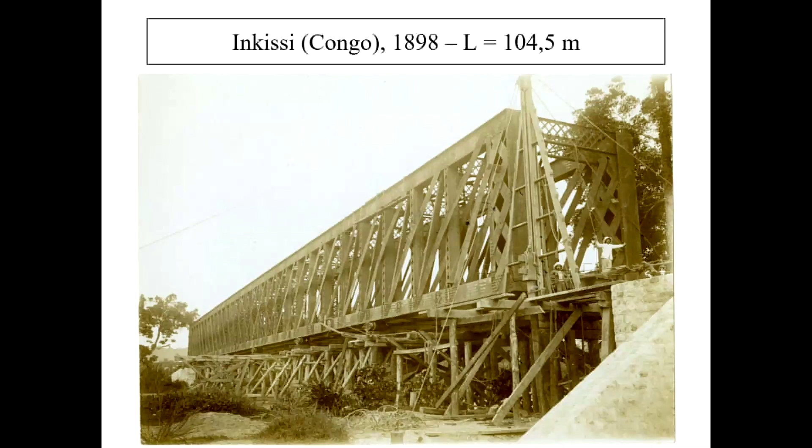So I guess you know that the so-called invention of Vierendeel was to remove the diagonal elements of the girders, at a time when the standard design of steel girders was either lattice or warren type. This is a typical railway girder produced by the Belgian steelwork industry around that time. It's a 104.5-meter span for the railway line between Matadi at the mouth of the river Congo and Leopoldville, then the capital of the Congo, completed in 1898.

He exposed his idea in a paper published in 1896 in Belgium, and also in patents submitted in Belgium, in Great Britain, in Austria, and in France in 1896. The text of the 3 patents shown here, the Belgian, the UK one, and the French one, is very similar.

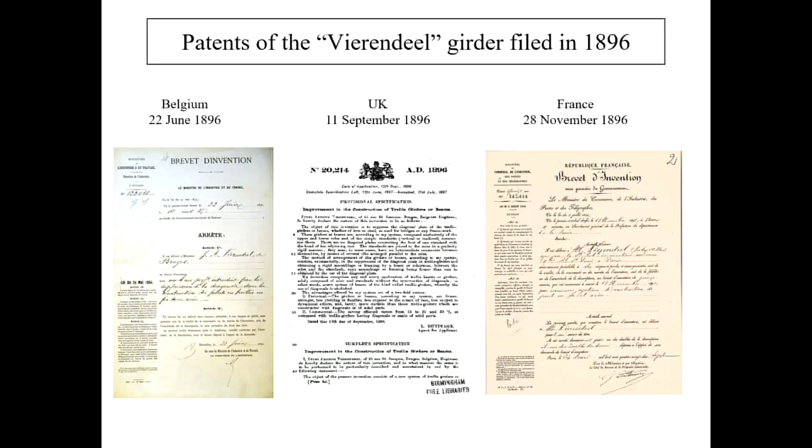Here are the plates of the patents that illustrate this idea of girders without diagonals. We have rather sturdy and stiff nodes, and also vertical posts, here or here, with significant bending stiffness. Vierendeel imagines girders with constant depth or slightly varying depth above here.

Of course, this strange design with a double level of cells has never been applied, and neither has this fancy, let's say, neo-Gothic architectural decoration of these bridges ever been applied.

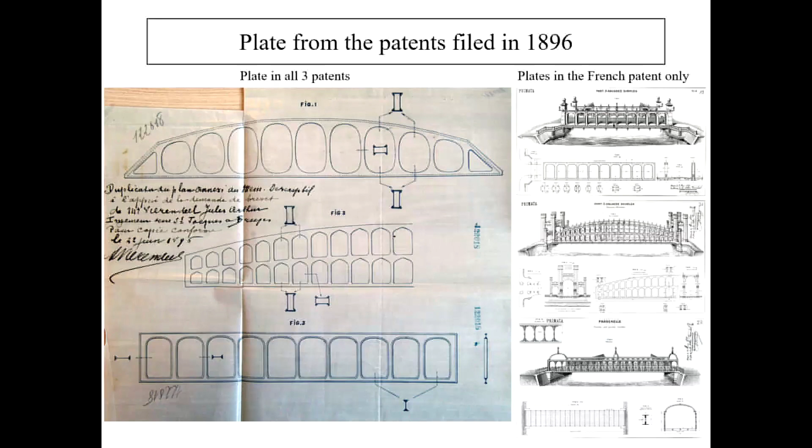Was the idea of removing the diagonals really new? Quite certainly not. The story of the girders without diagonals before Vierendeel has yet to be written. I have picked here 2 examples in the UK, well before 1896. They are both quoted in the book by Rennisson on North-East Civil Engineering Heritage.

There is this large railway bridge over the Wear River in Sunderland, built in 1879, still in service, and the supporting girders of the canopies and roof at Durham Station from 1870. To be fair, Rennisson does not state explicitly that these are actually true Vierendeel structures. Typically for the arch bridge, he says that it is a Vierendeel bowstring type, and I suspect that the actual structural behavior is more of the bowstring type. And the Durham girders, being in cast iron, could never actually function safely as Vierendeel girders.

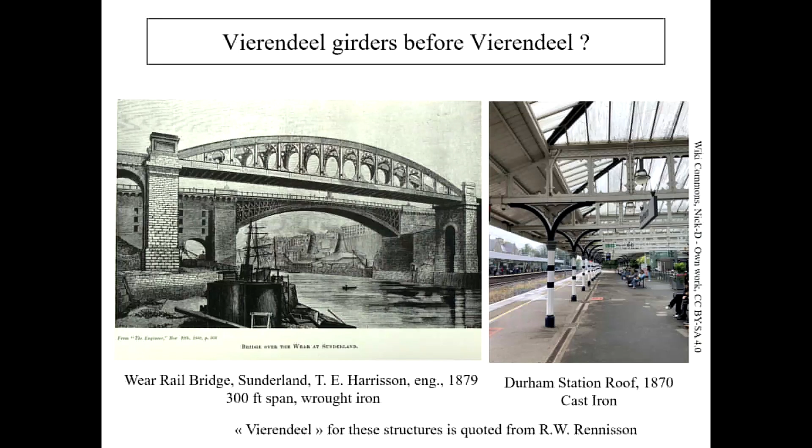Removing the diagonals of a girder is not sufficient to have the structure truly working as a Vierendeel girder. Why? We have to hear the arguments of Vierendeel and understand the context of structural design at the time, in the mid-1890s. Vierendeel was well aware, as many other engineers, that the elements of a so-called trussed girder are submitted not only to normal forces, but also to bending.

This bending arrives from the practical realization of the connecting nodes, made with gusset plates and rivets, which are not perfect hinges. So the stress arising from the rotation of the nodes, and therefore from the bending of the elements, were called secondary stresses, although they were known to be not so secondary to the primary stresses resulting from the normal forces.

There were already methods available to estimate these secondary stresses, but they were very tedious and cumbersome to apply. The practice and philosophy of design of truss girders at the time was: one, assume all nodes to be fully hinged perfectly. Second, derive the normal forces in the elements only by the equations of statics, equilibrium, or by graphostatics methods.

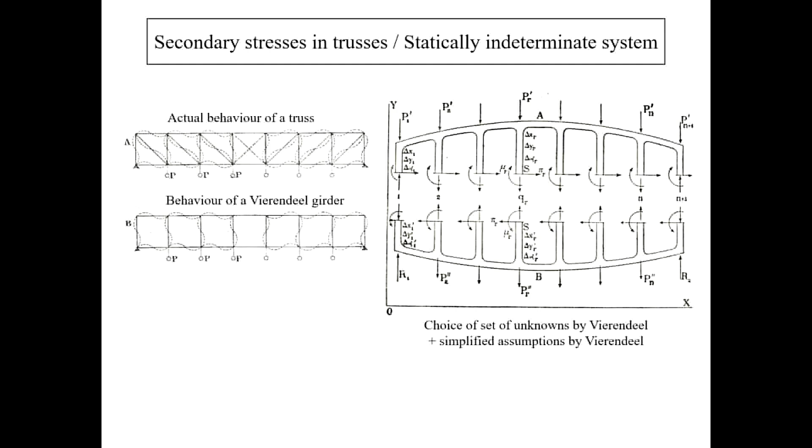And the following year, 1897, Vierendeel set up a test up to failure of such a prototype. This occurred during the international exhibition held in Brussels that year. It is said that Vierendeel paid himself for the test. It took place in Tervuren, in Brussels, on the grounds of the site of the exhibition dedicated to the Congo.

Anyway, this is an extraordinary test by its sheer size. The loading of bridges were common, but I believe that there had never been before a test up to failure of such a large steel girder for bridges.

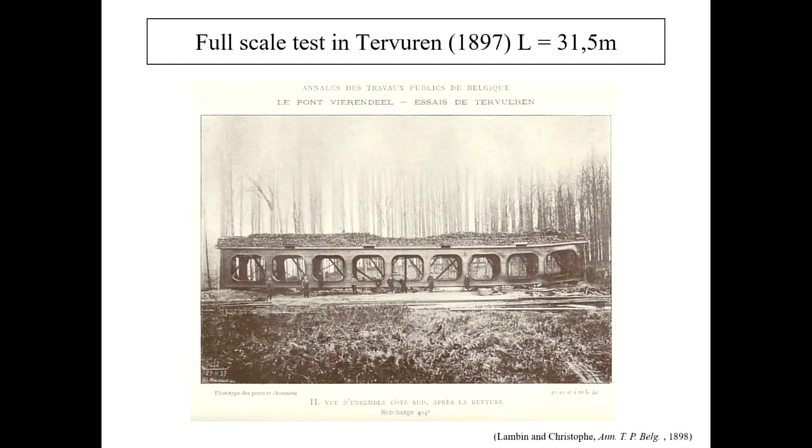The Ministry of Public Works dispatched two engineers to watch the test. They wrote an extensive report which raised doubts about the claim by Vierendeel of the economical character of his system. Vierendeel immediately replied and dismissed the objections of his contradictors.

And this will always be the same trend for decades. In the discussions concerning his system, Vierendeel praises the engineers who support him and attacks vehemently and often with bad faith the detractors of his system. He never accepted any criticism of his invention.

Three last comments here. One of the two witnessing engineers and author of the report was Paul Christophe, who would, two years later, be the first to publish an extensive and non-commercial survey of the state of reinforced concrete construction and technique, and also introduce the standard elastic method for determining the longitudinal reinforcement in cross-sections of reinforced concrete beams.

The two witnessing engineers, Lambin and Christophe, published their report in the official journal of the Ministry of Public Works, the Annals of Public Works, but also that same year in the Bulletin of the International Association of Railways, which supports the argument that the Vierendeel girder was from the beginning meant to be used for railway bridges.

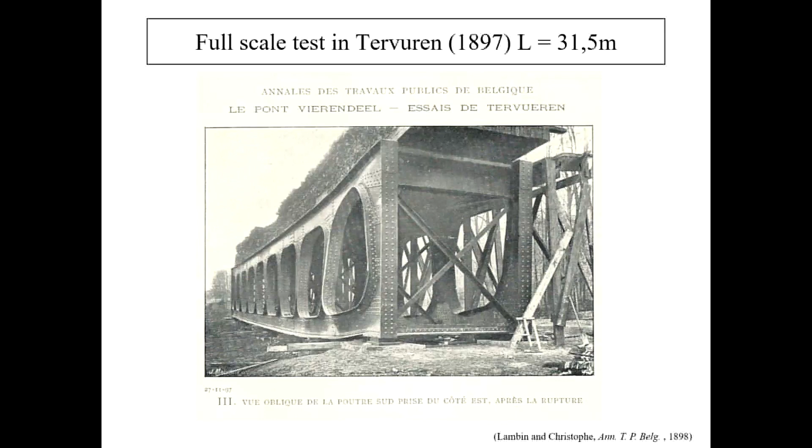Just one month after the completion of the test, Vierendeel submitted his patent in the US. It includes an illustration of a different kind of girder intended for railway spans. You see clearly the tracks here, the longitudinal beam supporting the tracks, with varying depth at this time.

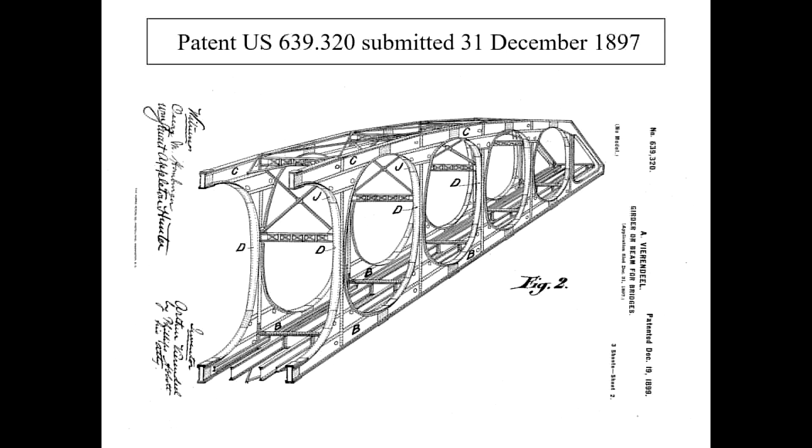But there will be no application of Vierendeel girders to railway bridges before the 1920s, meaning 25 years after the patent. In fact, all Vierendeel girders designed by Vierendeel himself in Belgium, and there are not many, just 6 or 7 before 1914, are footbridges or road bridges.

The first, top left here, in 1898, is a footbridge built in the small town where Vierendeel grew up, was raised, Geraardsbergen. Curiously, Vierendeel never claimed in his writings to be the author of that first bridge.

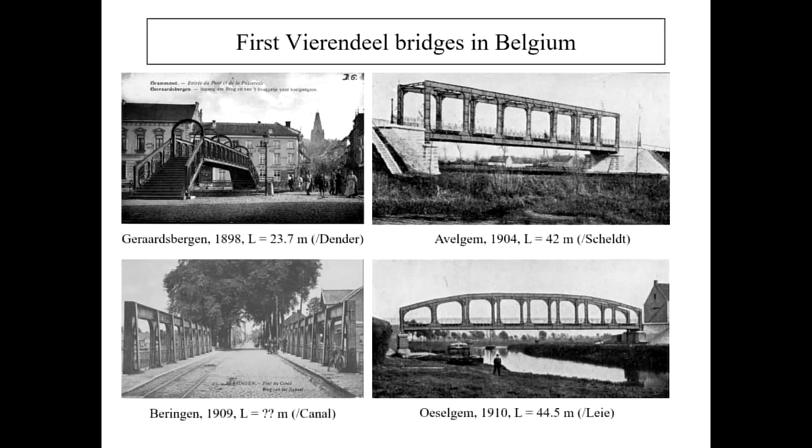Vierendeel also patented his girder without diagonals for reinforced concrete. He designed himself this footbridge over the tracks at La Louvière railway station, built in 1913. In Belgium, this was the first Vierendeel in reinforced concrete, and also the first time an arch form with a parabolic upper chord was built. I think that's a quite elegant design for the time, especially the detailed design of the connecting nodes.

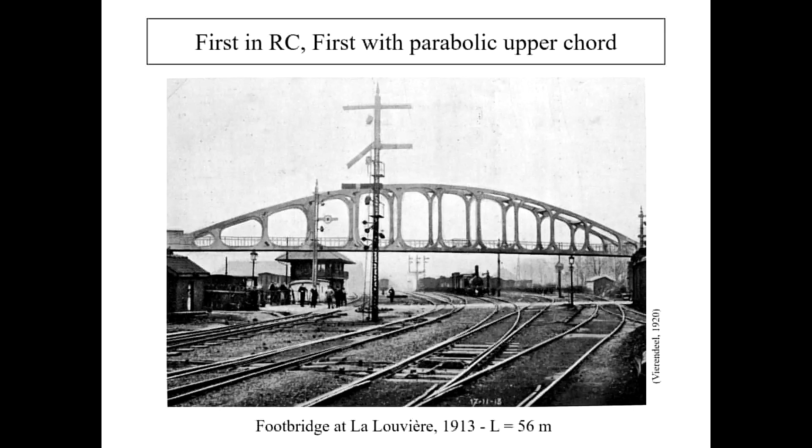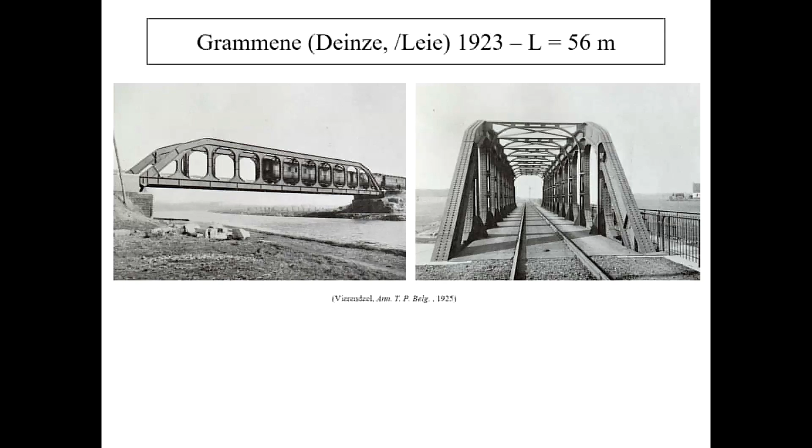So the first railway bridge using a Vierendeel girder that was adopted by the Belgian railways was only built in 1923: a single-track bridge spanning 56 meters over the Leie River near Deinze, not far from Ghent. But this bridge had a complicated history.

First, I would like to remind you of some dates. During the First World War, the Germans were not able to fully occupy the Belgian territory. The front line stabilized along the Yser River, and behind this front line the territory remained under Allied control.

In 1939, France and Great Britain were at war with Germany from September 1, 1939. But Belgium was only invaded by the Germans on May 10, 1940, and the battle lasted 18 days, until the capitulation of the Belgian army on May 28, by order of the king. In order to slow the invasion, the retreating Belgian army destroyed many bridges in Belgium.

In particular, this original bridge was destroyed on May 25. But two years later, in 1942, German engineers had already reconstructed the bridge, and already doubled it, because it was an important line to bring material for the construction of the Atlantic Wall.

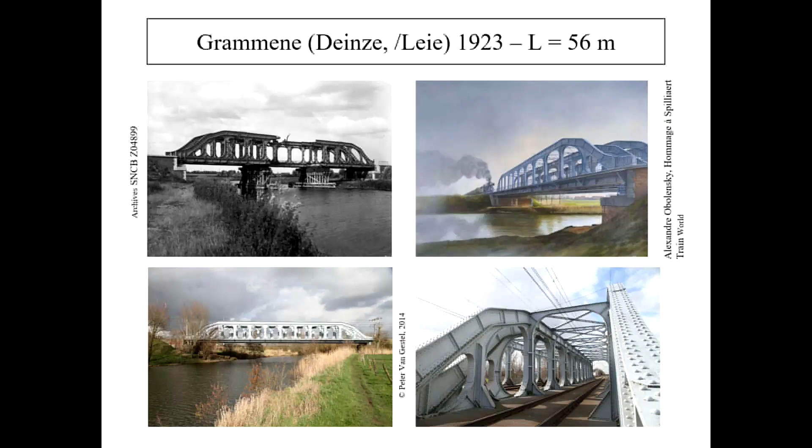The next chapter of the story of the Vierendeel railway bridge takes place in the Congo. Famously, the explorer Henry Stanley, exploring the territory for the Belgian King Leopold II, declared, "Without the railroad, the Congo is not worth a penny."

I already mentioned a bridge built in 1898 for that line between Matadi and Leopoldville. Early during the exploration of the territory, the mineral richness of Katanga had already been discovered in 1893. Katanga is this region here, north of Rhodesia, former Rhodesia.

In 1906, Leopold II set up 3 companies to exploit the Katanga province, which was still very isolated in the early 1900s. One of the problems was, of course, access. That's the reason why a railway company called BCK was set up in 1906. BCK means a railway company from the lower Congo region to the Katanga.

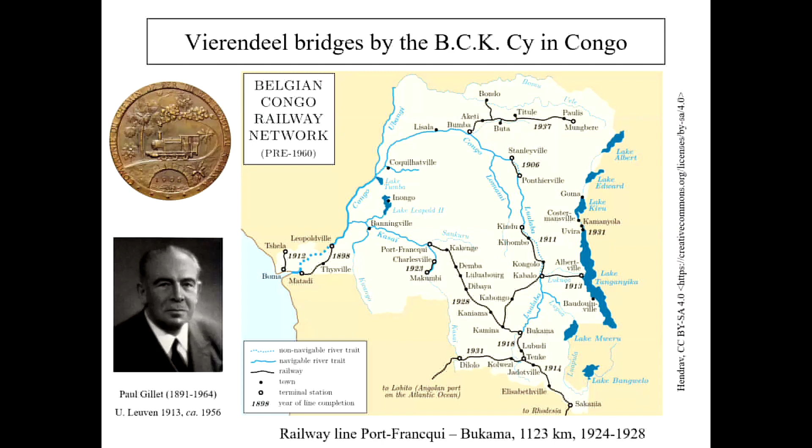Built between 1924 and 1928, between Port-Francqui here and Bukama here, that's a 700 mile long line, about 1,100 kilometers. The most difficult bridge to build was for the crossing of the river Lualaba at Bukama, at the eastern end of the line. The site conditions were difficult for building the foundations of the piers: geological conditions, speed of the stream of the river, and its flow.

The superstructure of this 250-meter long bridge consists of 4 identical spans, trapezoidal in shape, of 62-meter span. The line was inaugurated on July 7, 1928 by King Albert I and his wife Queen Elizabeth.

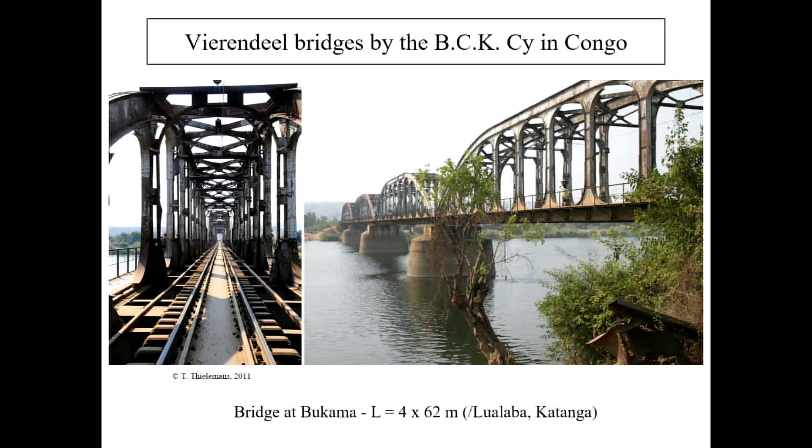This bridge is still standing today, even if it does not accommodate important railway traffic. It serves as a crossing of the river for pedestrians. The bridge at Bukama may be the longest on the line, but this bridge here over the Bushimaïe River has the largest span, 72 meters, single track, and is of the arched type.

What's typical of the Vierendeel girder can be seen quite well here: all elements have an I-shaped cross-section able to sustain bending forces, bending moments.

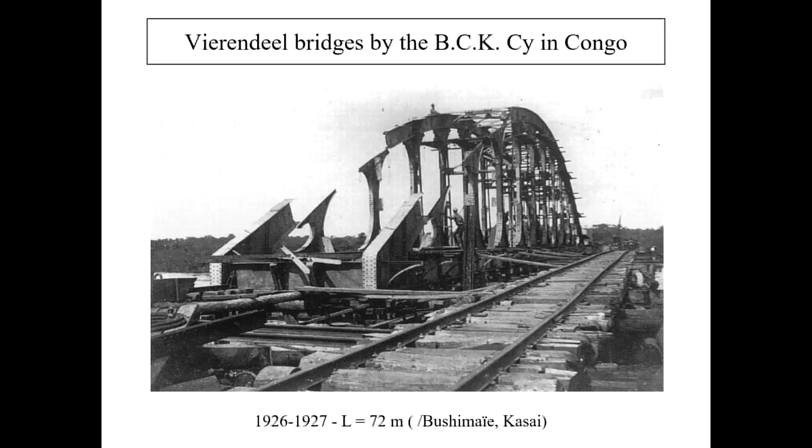I managed to find the drawings, blueprints of this bridge in the archives of the steelwork contracting company Baume et Marpent. What is very interesting to notice, it's written here, maybe you could not read it, so I will say it: all the technical details of the execution drawings are to be approved by Mr. Vierendeel. You see here his signature, dated from the last day of the year 1926.

So Vierendeel probably did not do himself all the detailed calculations of that bridge. Remember, he was also an official and also a professor at the university. But he checked the final results and signed the drawings, taking the responsibility, and most probably justifying like this the fees he was paid for, either as royalties of his patents or simply as a consulting engineer.

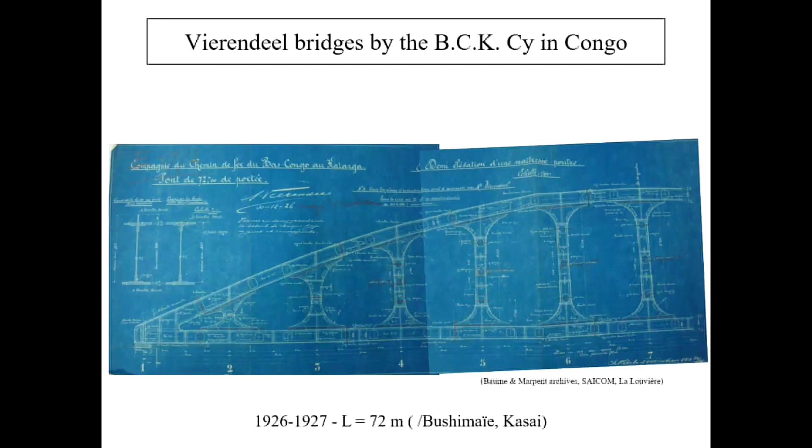Besides the Bukama Bridge, the Vierendeel Bridges built by the BCK company are very poorly documented. Apparently, there was a standard type for 42 meter span, and several were built by different steelwork shops in Belgium. With the help of Google Earth, I have spotted several of these Vierendeel bridges built for the BCK in the 1920s.

They are still in place, crossing streams in very remote areas. The definition of Google Earth is not very good for that part of the world, and they are nearly 100 years old. I have even found pictures from 2 years ago showing some maintenance.

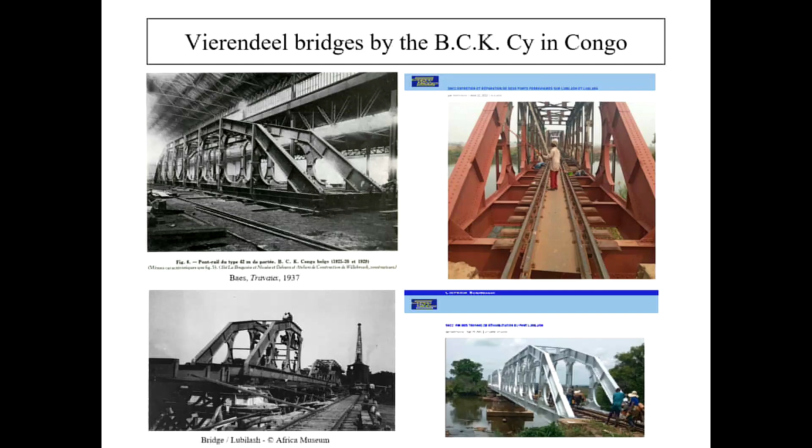From some pictures that are kept at the Africa Museum in Tervuren, it seems that Vierendeel bridges were built after 1928 on extensions of the line. Returning to Belgium, just after completion of the construction, there was a large number of spans, at least 25, in Congo.

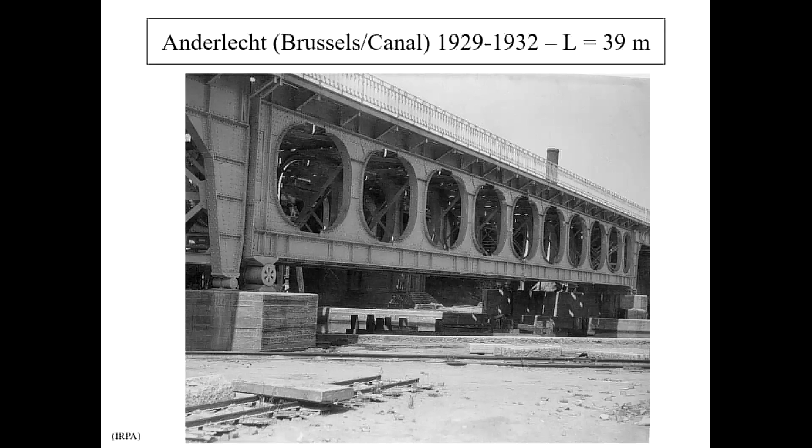The second Vierendeel railway bridge built for the Belgian railways is for this crossing in Brussels of the canal, a shape that reminds of the prototype tested in 1897. The span of the prototype was 31.5 meters and it is now 39. In fact, these are two independent single track girders, and they are skew also.

And here also, on the right, the signature of Vierendeel on the drawings, most probably prepared by the engineering office of the railways. The bridge was damaged, as many others, in May 1940. I will come back later on that kind of fracture caused by the blasts of the explosives, but it was repaired and it's still in service.

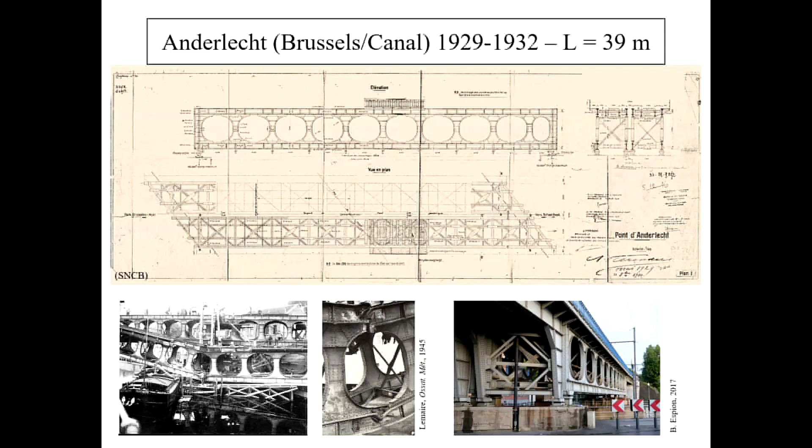I have not found that this bridge was damaged during the war, and it is still in service. In fact, there was no need to blast it before, because just another one on the same line had already been blasted.

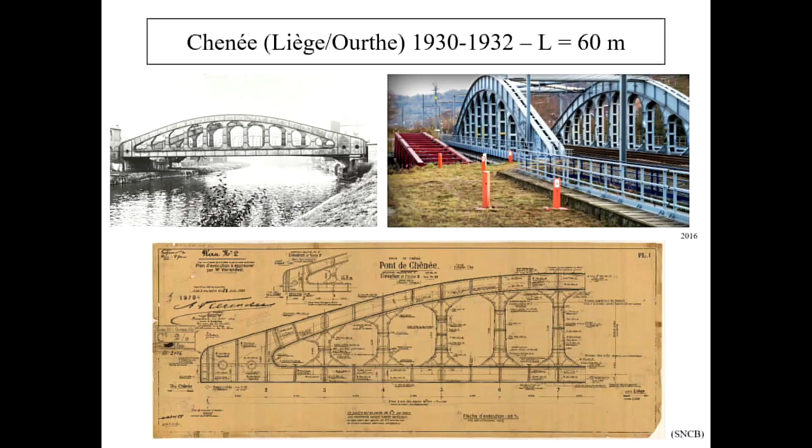From the late 1920s, only Vierendeel's so-called type 5, or arched form, will be designed and built in Belgium, and a significant number of these bridges will be built in the 1930s, either as road bridges or railway bridges. But a significant event took place in 1932 or 1933 to allow this: a settlement between Vierendeel and the Belgian government to allow use by the state administrations of the Vierendeel girder type without the supervision of Vierendeel, and presumably the payment of fees to him.

I rapidly survey here the story of the Vierendeel road bridges. I say rapidly because I would rather use another hour to develop this, and besides, I have already written papers about that story. This is intimately linked to the introduction in Belgium of the realization of connections in steel structure by electrical arc welding, a novel, untried technique at the time.

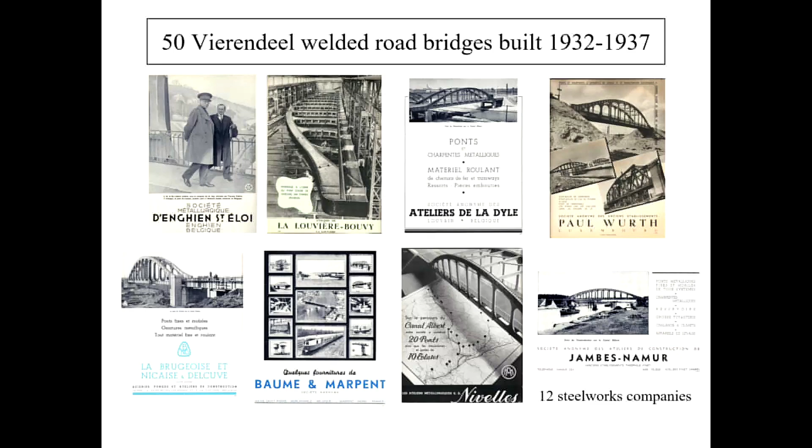After that initial success, about 50 Vierendeel welded road bridges were built between 1932 and 1937 by 12 different steelwork contractors. These are advertisements by 8 of them, and they all featured their involvement in the Vierendeel bridges of the Albert Canal. There were 3 suppliers of electrodes or welding processes, but the leader was the company Arcos, which claims to have contributed to the welding of 50 bridges of the Albert Canal.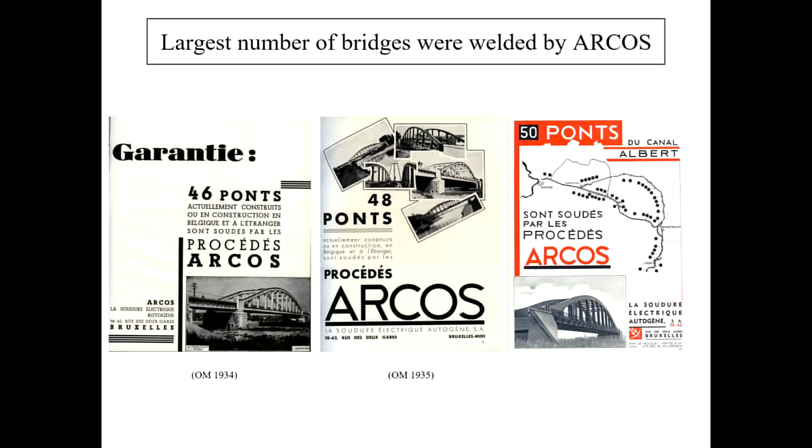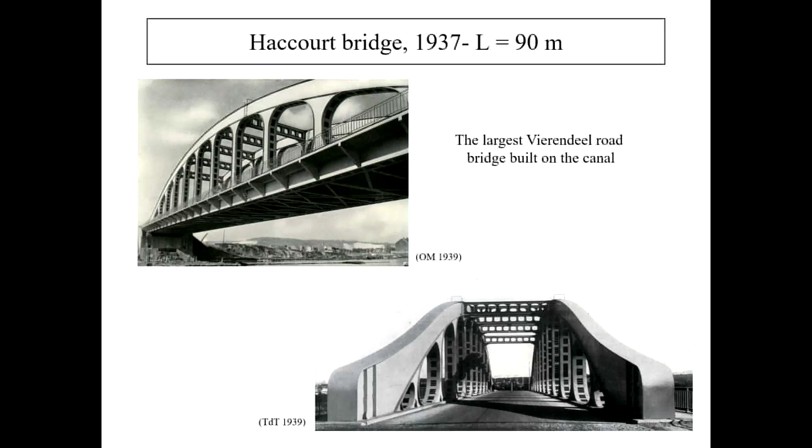The longest span, and one of the last to be built in that series, was in 1937, the bridge at Haccourt near Liège. The notorious bridge at Hasselt was the longest span of the type when completed in 1936.

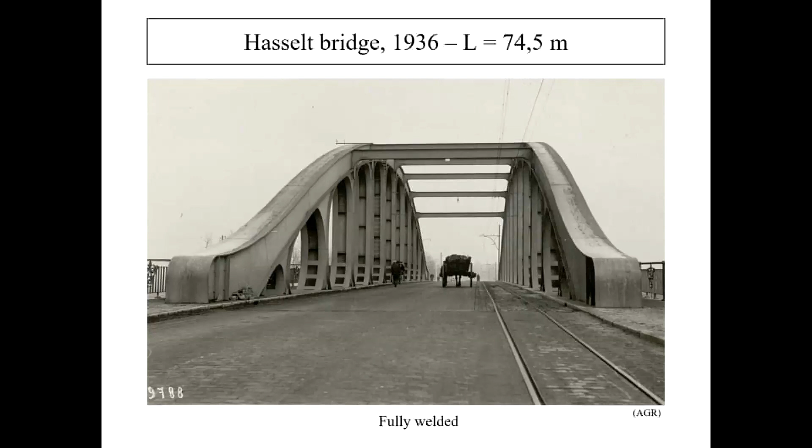But the bridge at Hasselt is unfortunately famously known internationally for its spectacular failure on March 14, 1938, when it suddenly broke and fell into the canal. It was early in the morning, no loads, no variable loads on the bridge, and no casualties. This is usually referred to as the starting event of the brittle fracture story of welded steel structures. But for months, even years, nobody was able to provide an explanation for this spectacular failure.

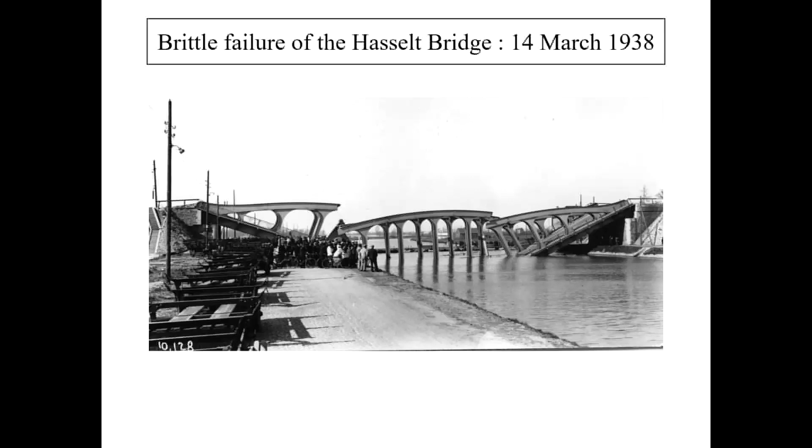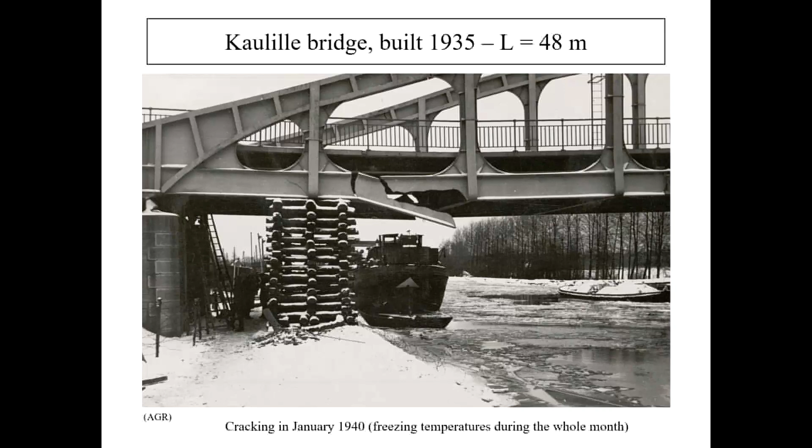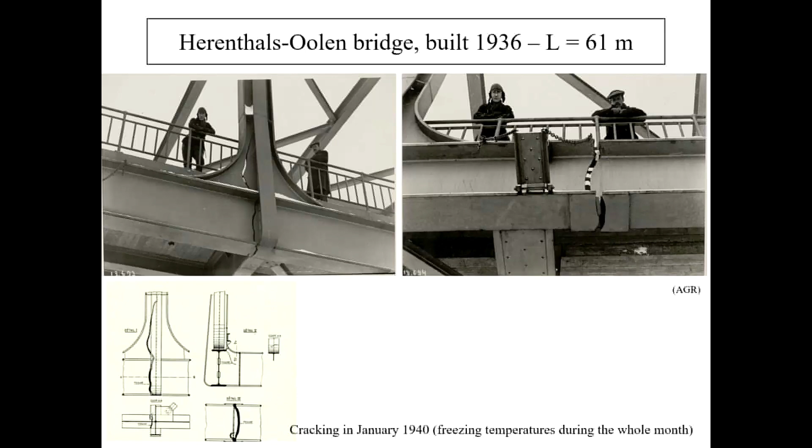In March 1938, all the Vierendeel welded road bridges in that program had already been built. But the Hasselt Bridge was not the only one. During the very cold month of January 1940, 3 other welded Vierendeel bridges exhibited significant brittle cracking: a small one at Kaulille, built in 1935; one with spectacular cracks across the beams at Herenthals-Oolen; and also a third one at Hermalle, also with spectacular brittle cracks.

But these were only the 4 most spectacular failures. In fact, cracking in the workshops and out on site had already been observed since the very beginnings of the introduction of the new technique, since 1933, and not only on Vierendeel bridges, but also on other types of bridges and even on lock gates.

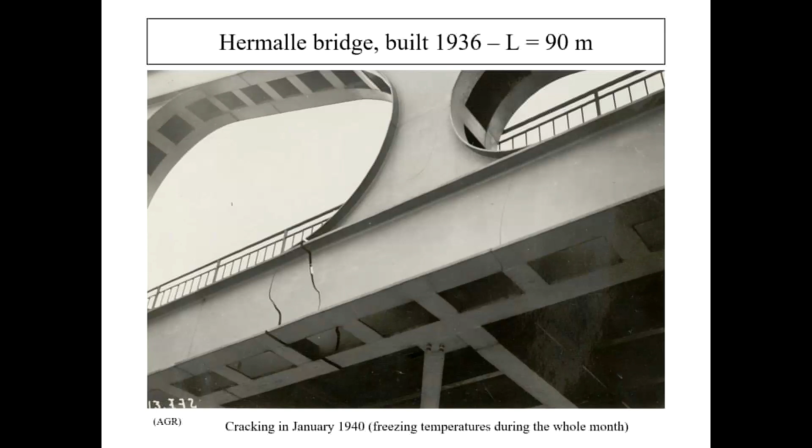Conclusively, it may be said that the carrying capacity of all these bridges was clearly insufficient considering their state, and it is somehow fortunate that they all have been blown up by the Belgian army in a hopeless attempt to slow the invasion by the German troops in May 1940, 5 months later. Therefore, the use of electrical arc welding was stopped for several years for bridge building in Belgium. And the reconstruction of the Hasselt Bridge during the war, of course, resorted to traditional riveted connections.

I believe that the wide-ranging applications of Vierendeel bridges in Belgium and in Congo in the 1920s and 1930s can hardly be grasped without an analysis of a network of influences between engineers, because the Vierendeel type bridge was never extensively used elsewhere. Of course, the top influencer, as we would call him today, was Arthur Vierendeel himself, but his alumni from Leuven included a large and influential group of followers who liked him, to use the vocabulary of today.

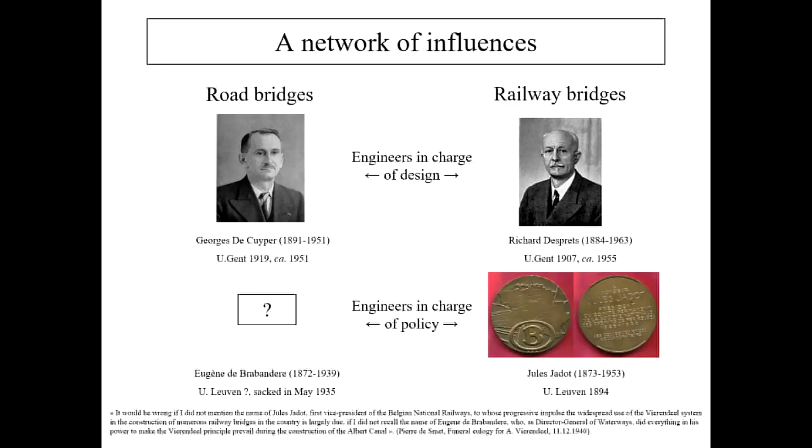Now it's time to begin the story of the dissemination of the Vierendeel railway bridges in Belgium in the 1930s. The first line to be electrified in Belgium was the fast line between Brussels and Antwerp. A new line was built with two Vierendeel type bridges at Mechelen.

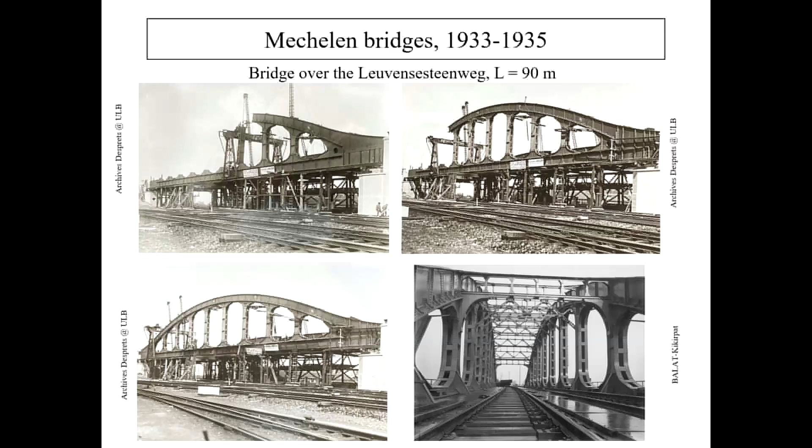But building still Vierendeel bridges in the 1950s means more than nearly 60 years after the patent of 1896.

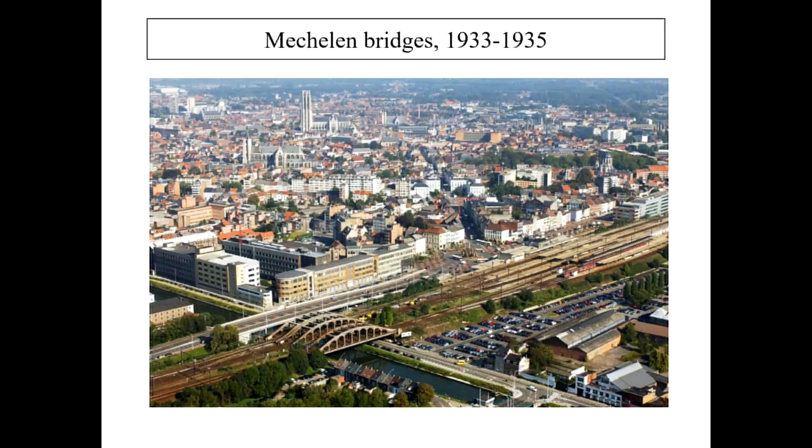These are also views of the erection of the smallest one, with a span of 63.5 meters. They also come from the archives of Richard Desprets at the University of Brussels.

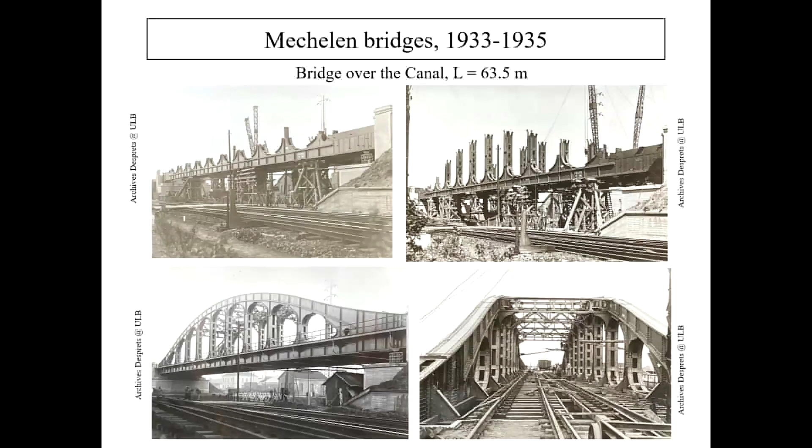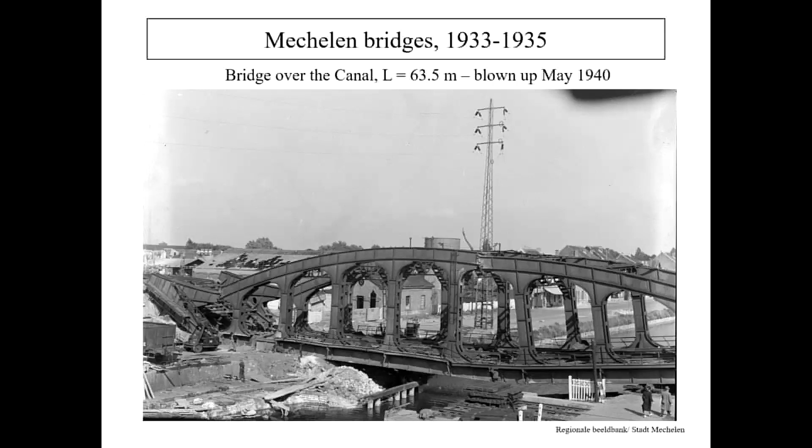This one, as many other bridges, was blown up by the Belgian army in its retreat in May 1940. I will come a bit later to the consequences of that. Because quite rapidly the bridge was repaired, and within weeks traffic resumed on that line.

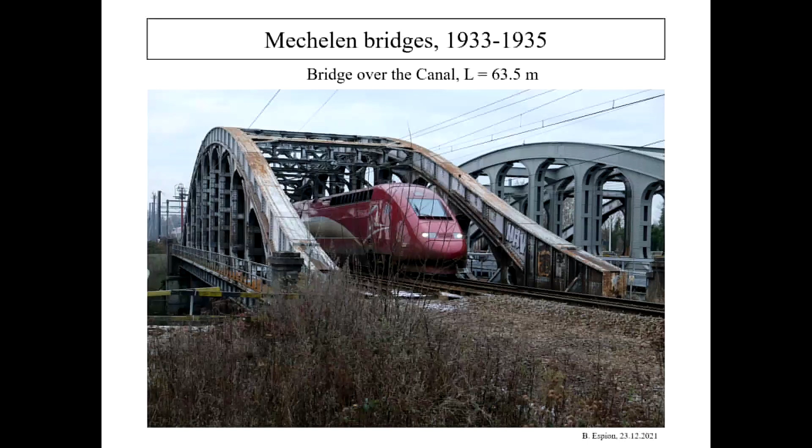At the same time, two other Vierendeel railway bridges were built across the Albert Canal at Herentals. The double track span is identical to the largest span at Mechelen. There was also a single track span. You can see on the drawings here that the signature of Desprets has replaced the signature of Vierendeel. The spans were erected by the well-known company Cockerill.

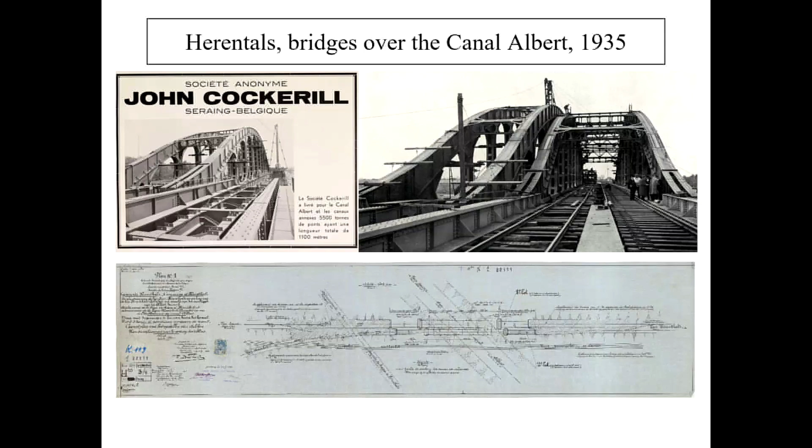Both bridges were also blown up in May 1940. The double track span was reconstructed just after the war, this one here, but not the single track one.

But the canal has been widened twice since then, and also the required level of free height beneath the bridge has increased. Therefore this old Vierendeel bridge from 1945 had to go, which occurred in January this year, January 2024.

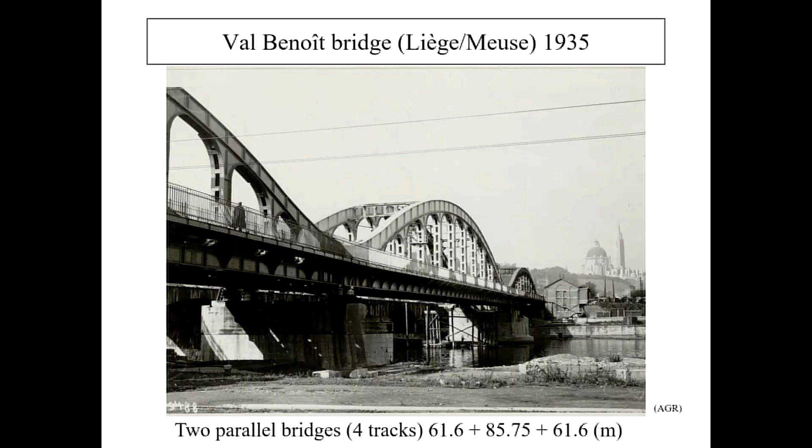This one also was destroyed, but this time, I would say accidentally. Note the date - it's on the eve of the beginning of the Second World War. In fact, a lightning struck the detonator and spark ignited the explosives, which were already pre-stored in the chambers. During the war, it was partly rebuilt, but after the war, it was replaced by a different kind of steel bridges with plate girders, still in service.

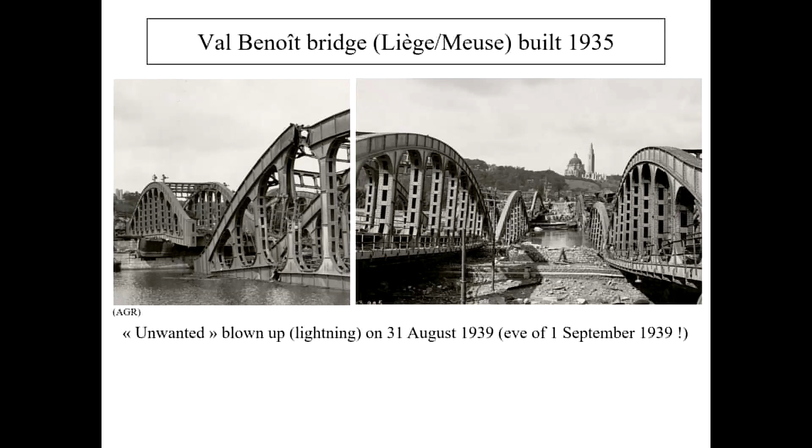Another one crossing the Albert Canal was the longest Vierendeel span ever built, single-tracked, 112 meters. Of course, also destroyed by the Belgian army in 1940. The result is here, rebuilt in 1946. No longer in use since 1992, awaits possible reuse as local crossing for pedestrian, cyclists, or light rail.

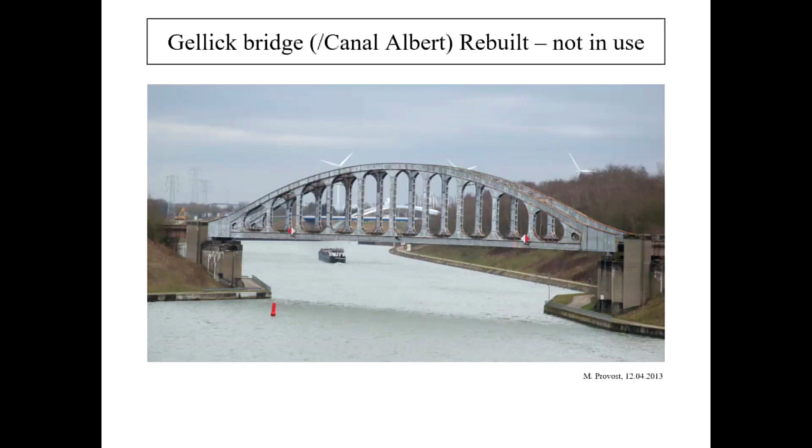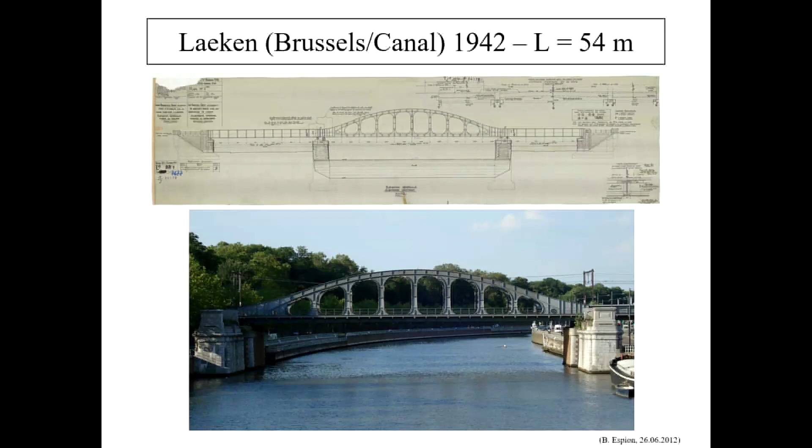In Brussels, you can find a second Vierendeel bridge crossing the canal just near the Royal Palace of Laeken. This is behind the estate of the Royal Palace of Laeken. This bridge replaced in 1942 a swing bridge dating from the early 1900s.

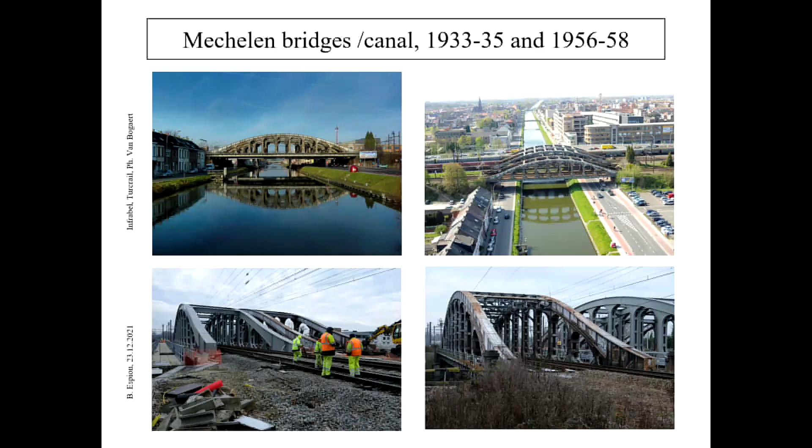But the fate of the 1934 bridge, here, this one, or this one, although in heavy daily use for a major line of the network, was under discussion. In early 2020, the owner of the railway infrastructures in Belgium ordered a thorough inspection of that bridge, which had not been maintained and painted for at least 40 years.

A thorough inspection beyond routine inspection. Elements of the decks were found to be significantly corroded by rust, and there were also signs of the damages here resulting from the blasting of 1940. But the corrosion problems can be fixed with an overhaul of the deck.

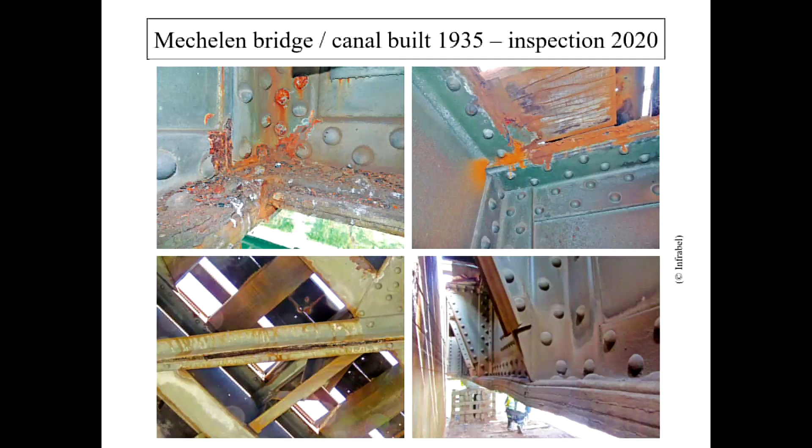But more problematic, more worrying, some very fine cracks were noticed in the vertical posts of both main Vierendeel girders at a limited number of locations, 7, 8 places on both girders. These cracks are very hard to see, often invisible under a layer of paint. They may have escaped previous inspections. But this was worrying enough to limit the traffic on the bridge, say only 1 track and 40 kilometers per hour maximum.

And also commit further studies. A report by a well-known engineering office from Brussels, specialized in controls for the insurance companies, hastily concluded that these were fatigue cracks.

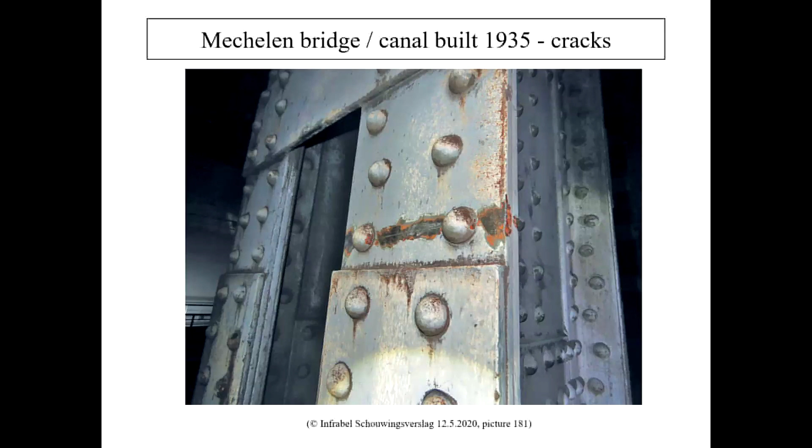Then the owner took the analysis further. First, there was an extensive campaign of material characterization. This is very, very little that I can show because there are pages and pages of different kinds of characterization, from which it was confirmed, I suspect, that the steel was a Thomas or Bessemer unkilled steel, as usual in Belgium at that time, with very, very low resilience or Charpy values, even not enough to qualify this steel as S235 by the standards of today at any temperature.

And clearly the steel of the plates and of the rolled profiles were different. The analysis of the fracture was entrusted to a specialized lab in the Netherlands, but it could not conclude if the cracks were either resulting from fabrication, from fatigue, or from the blast loading of May 1940.

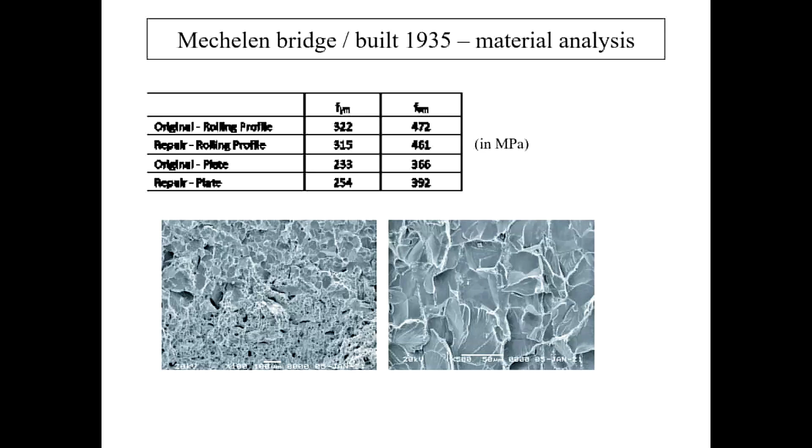Other analyses were performed, like the monitoring of the bridge with strain gauges. As you probably know, even with very heavy loads, the magnitude of strains that can be registered are low on railway bridges, but they can be useful to calibrate numerical models.

So several numerical models were developed by TUC RAIL engineers. TUC RAIL is a specialized civil engineering office with extensive experience of designing railway infrastructures and especially bridges in Belgium for more than 25 years. And at the end of all these studies in 2021, the origins of the cracks was still an unsolved question. And Infrabel, the owner of the railway infrastructure in Belgium, considered scrapping the bridge and replacing it with a new modern-looking bridge.

The construction of a new bridge requires a permit, in this case issued by the city of Mechelen, which raised in 2021 the question of the heritage value of this bridge. The city of Mechelen and Infrabel agreed to appoint an independent panel of experts to assess all documents produced in the process and rate the heritage value of the bridge. I was part of that committee, as was my colleague Philippe Van Bogaert.

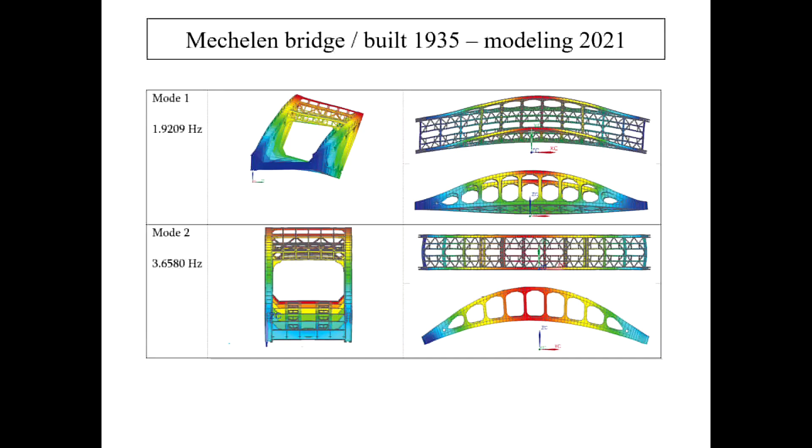To make it short, the committee found that the bridge had some heritage value, meaning deemed to be listed. The committee also agreed that the most probable cause of cracking was the blast loading of May 1940, and that the cracks had remained unnoticed since then, because there is good agreement between the location of the explosives and therefore the fractured zone, and the positions where the fine cracks were observed. Relatively good correlation.

Besides, all the computations indicated that the level of stress at the most critical locations was insufficient to initiate fatigue cracking. Fatigue computations showed that the fatigue life of this bridge after renovation can be extended safely for another 50 years, till the 2080s. This is somehow a testimony to the robustness of the Vierendeel railway bridges, even made with poor quality steel.

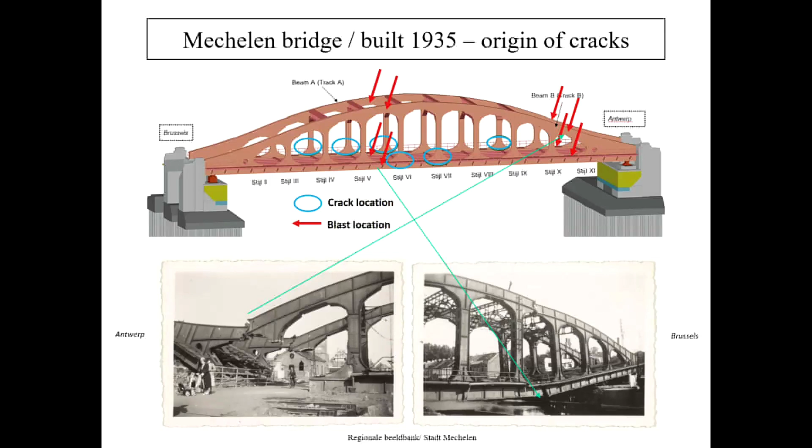Then the owner decided to keep the bridge and restore it, as he did for the two adjacent ones. A full renovation of the deck, where damages had remained unrepaired since 1940, are still visible. It has just begun recently. Where needed, rivets will be replaced by bolts, because welding is of course impossible on this old steel from the 1930s.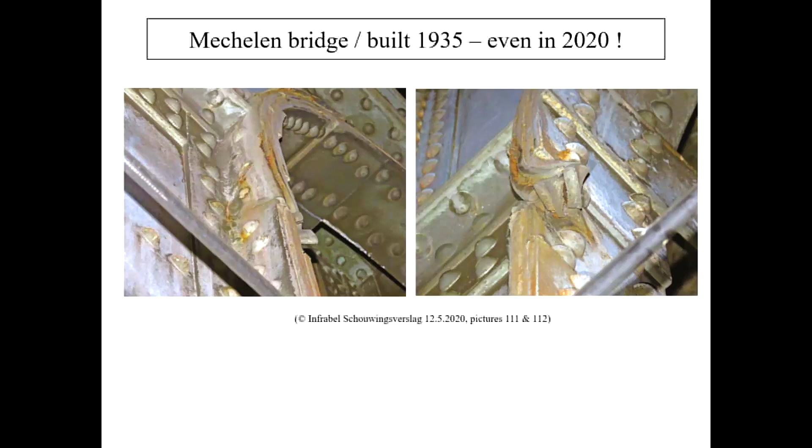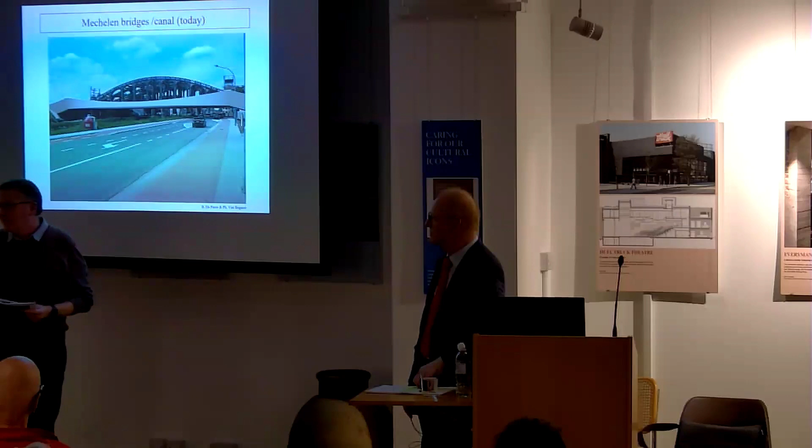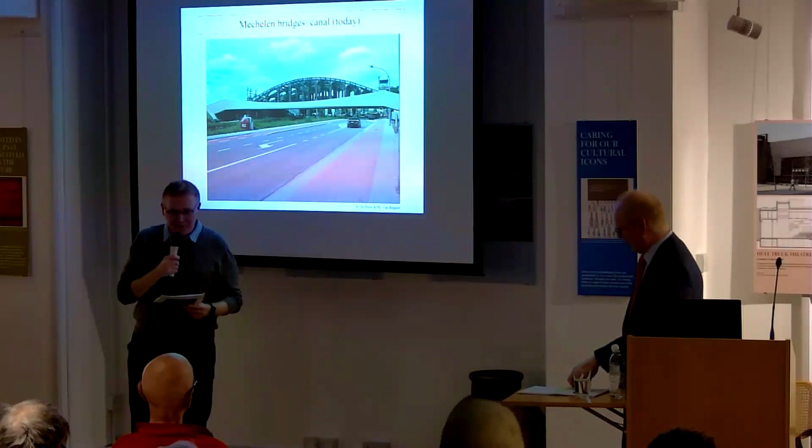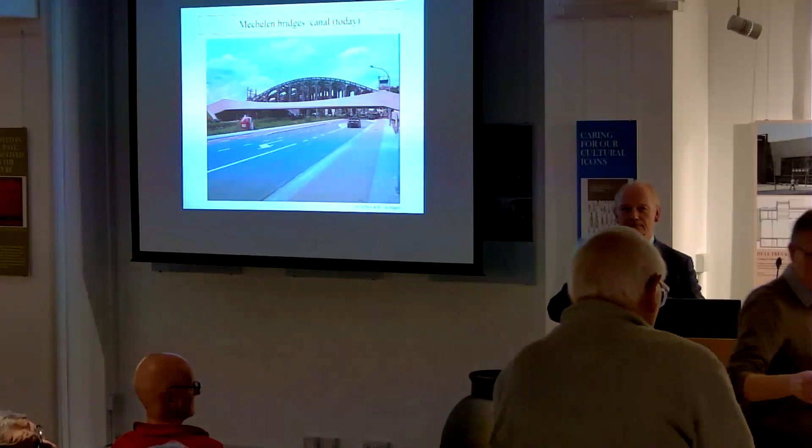My pleasure. Do we have any questions from the audience? If you could hold the microphone as close to your mouth as possible. David Anderson, once of the University of Warwick. I'm interested in the spread of the use of this form of construction in Belgium. Was this a result of Vierendeel's academic position influencing students into his line of thinking?

Yes, that's my opinion. When I showed this slide on a network of influences, clearly he was really a proponent, an aggressive proponent of his system during his whole life. Probably he managed to convince some of his former students in positions of power to adopt his system in Belgium, especially in the 1930s. But at that time, there was a lot of research in the four universities in Belgium, in the civil engineering departments, on different aspects of these Vierendeel girders. Finally, somehow all the professors were convinced that this was a good system.

Anyway, as you all feel, and as structural engineers, with this shaped form, this parabolic upper chord, under uniform load, this kind of bridge behaves like a bowstring, with no bending in the posts and no bending in the chords, top or bottom. It's only under variable loading, unsymmetrical loading, that you begin to have some bending stresses. But the case of uniform loading is the most critical, in fact, for the elements. So that's for the shape, the parabolic shape.

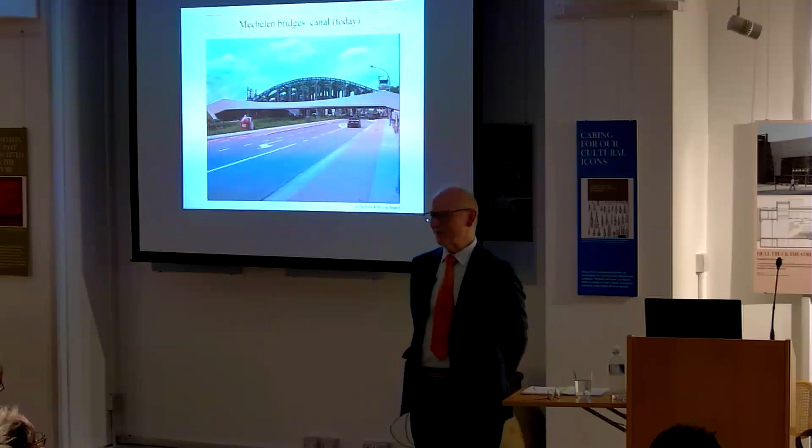So the calculation methods involved must have been rather similar, and I wondered if you had any information on this. On the airships, the methods used for the... on the similarity of methods of calculations. I would have thought they needed to be very similar.

And in fact airships did crash, of course, they all crashed, but not usually because of failures in their structure. Not until they started to fly and go around corners, and then the dynamic stresses, which had been ignored, caused them to crash very often.

Yes, so here we enter the story of structural mechanics, structural method of analysis. It's quite a long story, but I would say most of the methods that were derived for analyzing these kinds of structures were always purpose-designed, adapted to the form, especially typically.

It's a lot, because at that time you could only use the force method of analysis of statically indeterminate systems. So the question of the choice of the unknowns is paramount, and there is a lot of discussion about what is the best position of the redundant forces in this. Because at these points we know the value, it's an advantageous position for that set of unknowns.

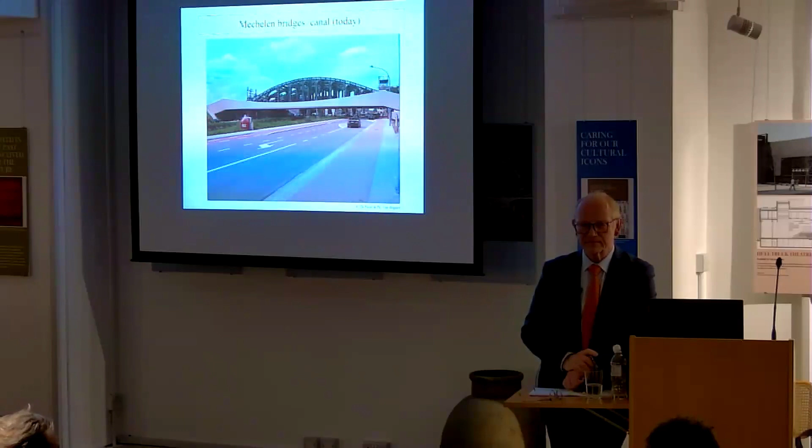You mentioned the first load test, which demonstrated load-bearing and stability, and the later one introducing the stiffness. Would you like to share your understanding of the brittle fracture issues of the late 30s and 40s, like in cold winter? And I would be curious to understand how the design evolved or the detailing changed following these failures.

My second question is about precamber, to know if any precamber was considered during the design of these bridges. And my last question: since this structural system is not usually as efficient in terms of materials as any triangulated structure, I wanted to ask what is your personal interest in such a typology?

Can you quickly remind the first? Brittle failure. Lessons from brittle failure.

First of all, I have to say that I'm a structural engineer, not a material science engineer, not a metallurgical engineer. I've done a lot of mechanical testing, but I'm really not a specialist of brittle failure from the material point of view. What I know is that steel produced in Belgium at that time was not of very good quality. Okay.

Prone, due to welding, probably to brittleness by nitrogen. Okay, so after, but of course this was not really known at that time. The understanding of this problem evolved after the war. All this story of the Liberty ships, you know, all this, and the story of the brittleness and the beginning of fracture mechanics, and improvements were made in the production of steel in Belgium. Also, some better rules for the detailing of the welding connections. So from the late 1950s, welding was again used for welding bridges in Belgium.

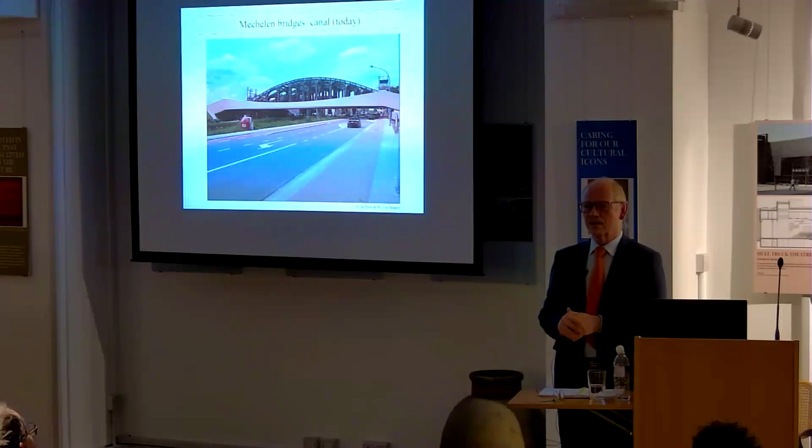But this was, fortunately I may say, for this, there was the war, and then everybody forgot what happened. But in the industry, the producers of steel, they knew. But I have to add that the Vierendeel type construction, highly statically indeterminate structure, internally statically indeterminate, is of course prone to built-in stresses arising from the welding, which are less present in typically a Warren type, classical triangular truss, which are more statically determinate, even if a bit statically indeterminate built-in. So it's possible that's an additional cause of the failure of the Vierendeel welded bridges.

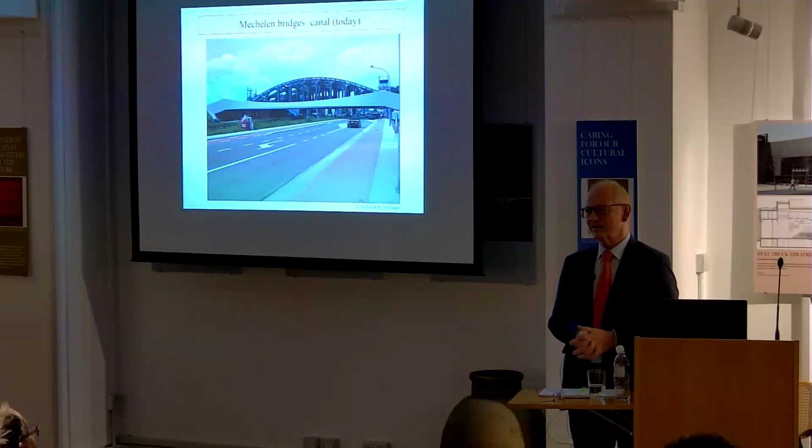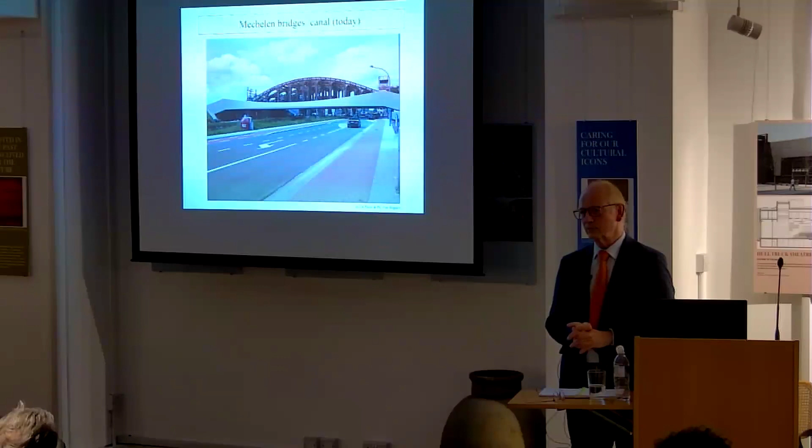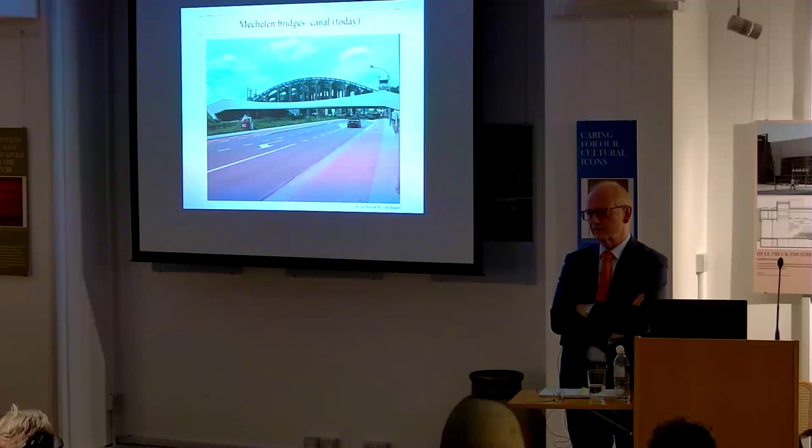Road bridge, yes. Yeah, it's about the welding. Yeah. There is a suggestion that with nitrogen-bearing steels, it's not just the stresses in the weld which are a problem. It's the fact that in the heat-affected zone, any nitrogen precipitates which are in the steel decompose, and the nitrogen then goes into the heat-affected zone in a higher concentration. So it makes that heat-affected zone much more susceptible to brittle fracture.

There's a lot of hand-waving about the whole subject of fracture toughness, but I think that is a very interesting point that I've come across. Yes, I agree, but as I had to say, I read a bit about this, but I'm not able to fully understand the consequences of that. But I understand what people say about this. I don't think anybody does. Okay.